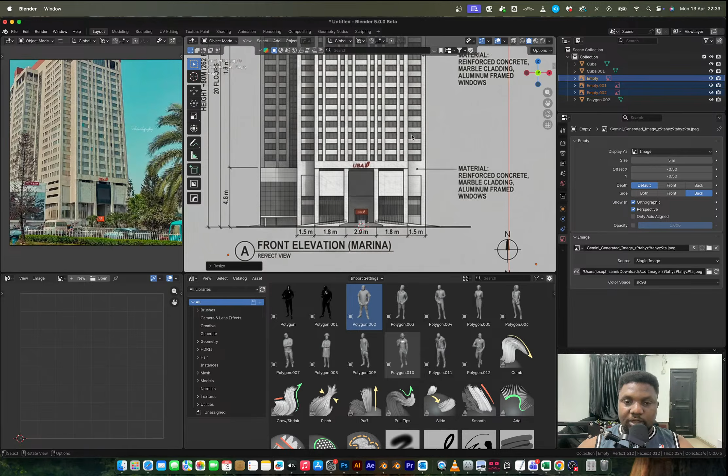So yeah, I have references in here already. Okay, it looks like I might have to adjust the camera of the general scene so that I'm not having cut off like this, because I'm building this to scale, so it's going to be a really big building.

Oh my God, where is this thing? Is it around here? I think it's around here. Yep, clipping - so we want the end to have more zeros. Yep, so we're good.

Yeah, we already have a cube in the scene, and you won't believe there's a human in the scene too. That's to tell you how small the human is in relation to the entire UBA building. So I'm going to start with big cubes and we'll build from there.

So JX out of the way. And I think for these references, I'm going to turn on opacity and drop down the opacity. Big shapes first, then we go from there. I'm going to scale this up to this point - I think from here I would just build this first, and then from right here I start building all the floors, because I feel like I'll just create one floor and then duplicate for the others.

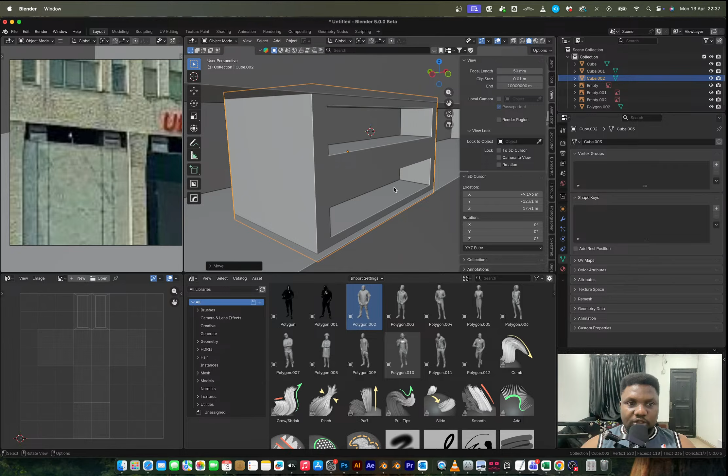right here I would extrude inward. So GY on this. I think this face I like to apply the inset tool to it. So right around here I'll bring this to this point, change to this, and we're going to have something like this - it's just going to be like a vent. Scale down, GX.

I can shift DX to create the second part of this. I feel like this should be smaller. GX, no? GX, shift DX, right around here. That's good - these two I would join, and I think I can duplicate to the other parts. For now I can use duplicate because...

What's going on? Why can't I select that? Wow, why can't I select this cube? GY. What? This is strange, like come on, man. This is strange.

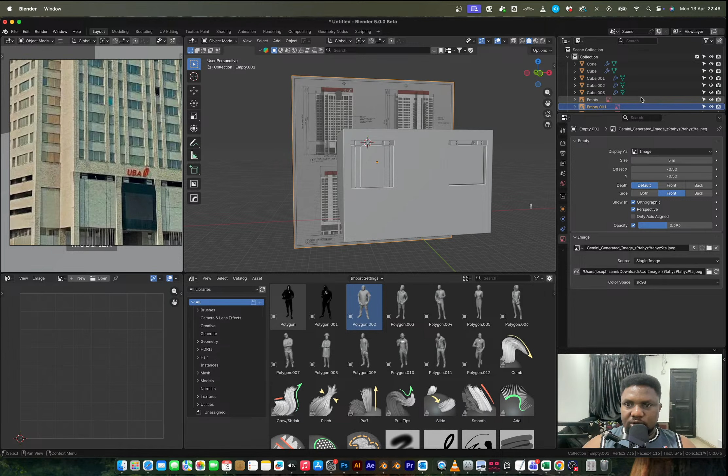So that's cool, I think all of this information definitely should be flipped. Oh, this thing of not being able to select things is just frustrating me. I need to be able to move fast, like...

Okay. So next up I'll do the center screen, and I think that screen looks something like this. Oh okay, it looks like this vent too should be in the center. So I'll shift DX and have that vent around here.

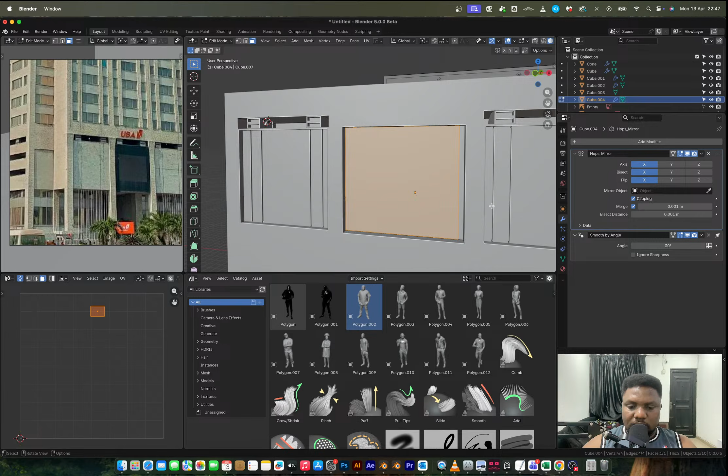Then the screen, we are looking at extrusion in. Select all, inset—no, extrude first of all, inset, SZ, and then extrude inward. So that's the screen.

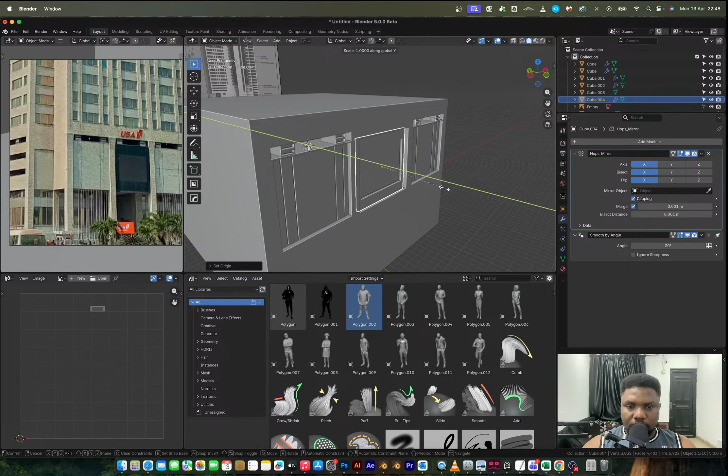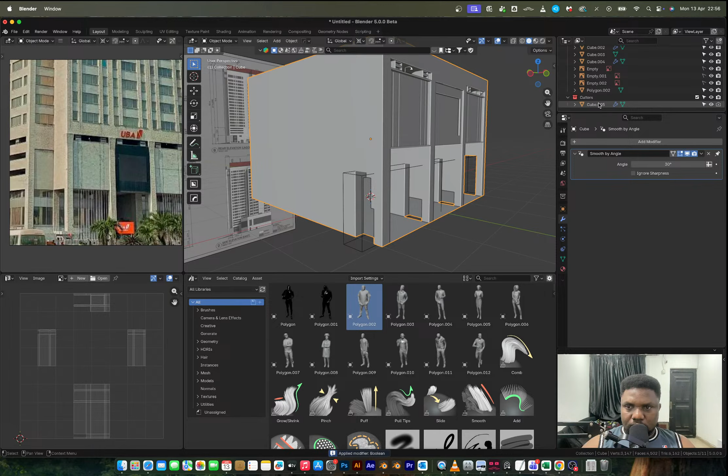I'm really not happy that this Blender is not working as expected. Like, this is already a difficult model to handle, and Blender is just making it so much more difficult.

I think right around here, there's a staircase.

I can SX, spread this out just like so, right? And on the side view, I can GY, SX, and add an array.

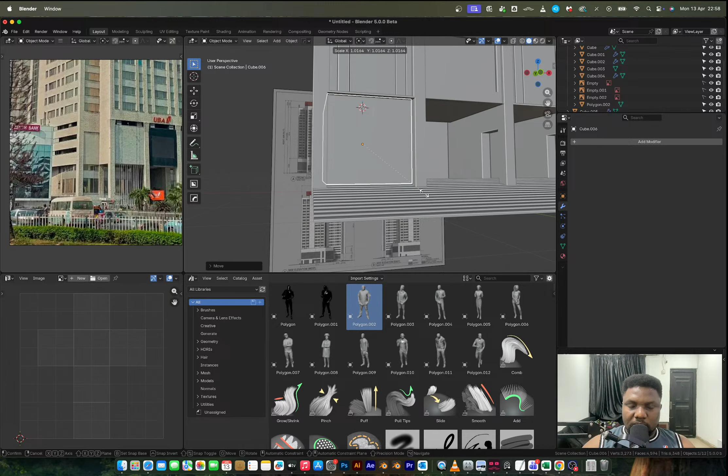Scale, I can GY, and then I can just start constructing the offices. I'm seeing something like this. We have windows down here. I don't know how many these things are, but size-wise it looks something like this to me, right? And maybe aesthetics-wise too, we have this looking something like this.

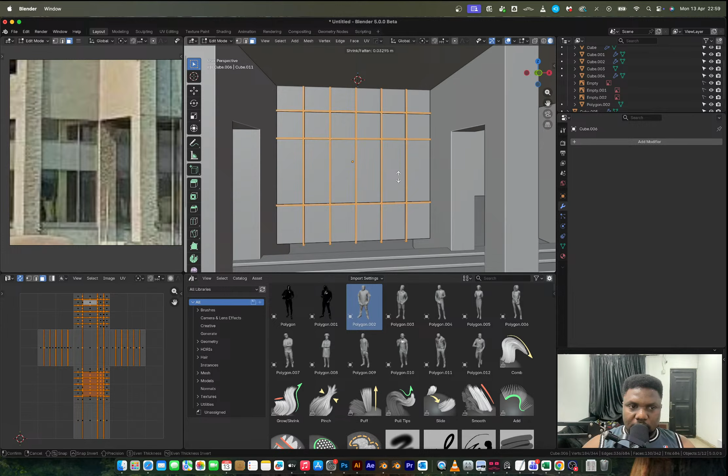So seems like all of these are extruded out, just like so, right? That's cool. And for the three left outside, I can shift DX and just occupy the space.

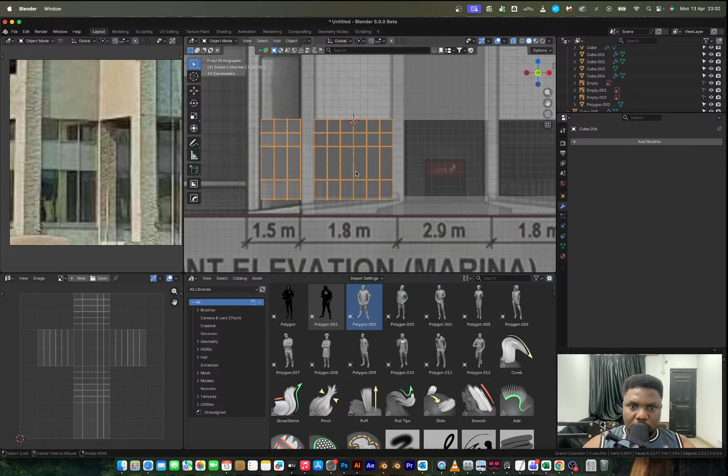It would be advisable to be applying texture as I'm working, right? It would make sense. So I'm just going to select by area.

So this is going to have—let's give this a glass texture. So I'm going to call this glass, roughness, reduce, assign. So let's see what we're looking like.

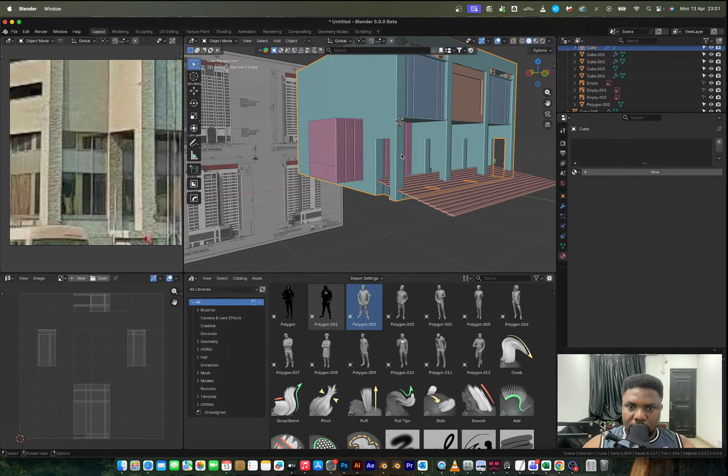Let's just go on, I don't think this thing has my time today, actually. So polygon textures, let's go look for concrete. All right, concrete material. I can bring this in here and invert all of that and just assign.

Why can't I see material preview? Like, I don't understand why I can't see material preview. So frustrated by this, and I still have a long way to go. Let me just save. I want to close and open Blender again, so give me a sec.

I think this is what? It's 7. So I'm going to close Blender and open it again. Just give me a second, guys. Shit.

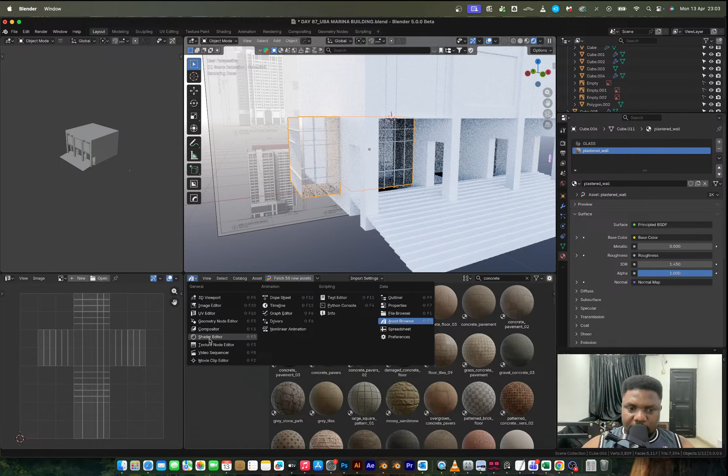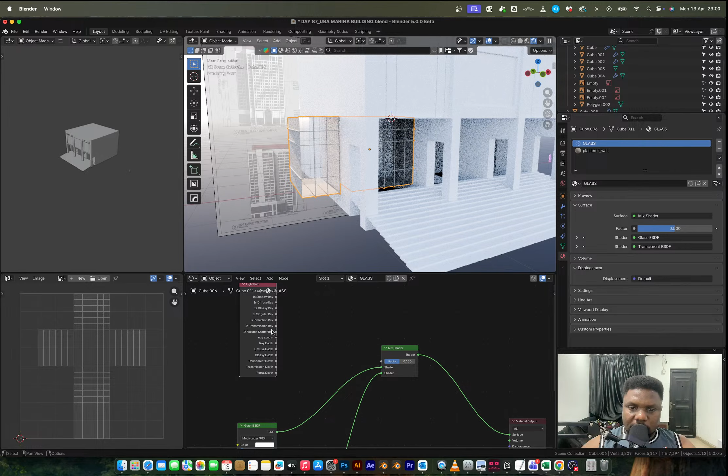That's cool, I think this glass needs a transparent texture. I'm going to do the material setup that Falcon taught me. Light Path, ray depth, and bring in a math node greater than 4. Cool. Okay, so back to this.

So I'm going on, let's go. This depth right here is around this area, so I'm going to bring in a cube, scale up, GY inward. All right, I can scale this a little bit.

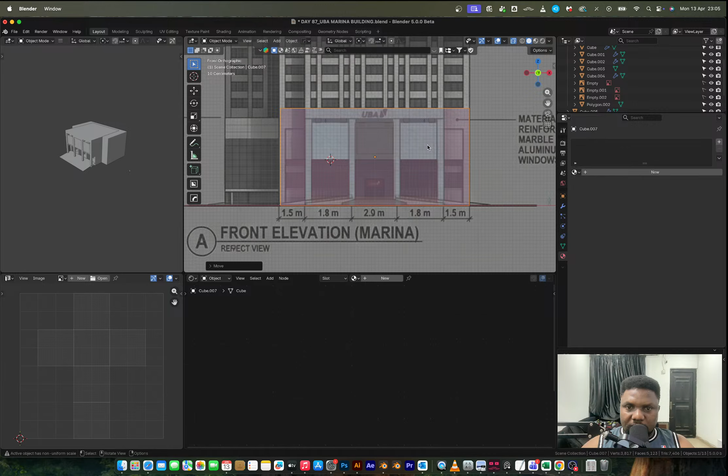That means this whole mesh probably needs to go inside like so. Let's see our reference.

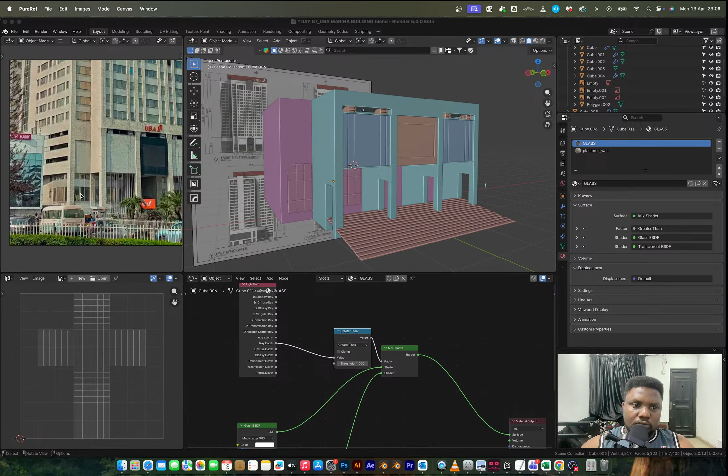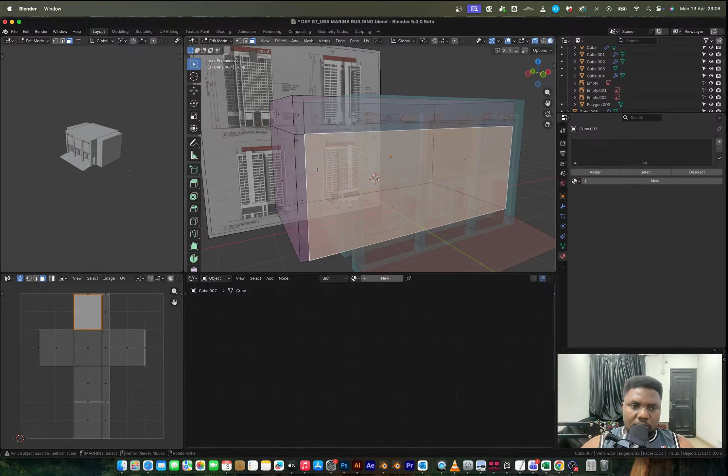So right here, I can put in 1, 2, and probably delete that face. That's cool.

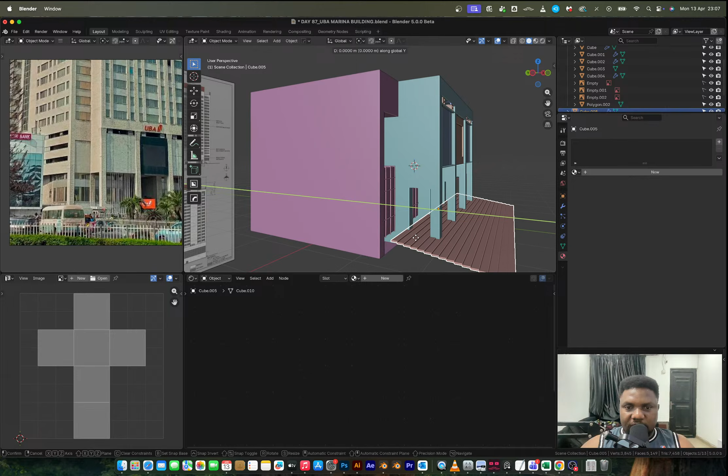Y is going to cover all of these parts. This I would GY in, so all of these faces I would EY into the space. This right here, maybe I would GY a little bit. That's cool.

All this I've been doing, I'm still on the ground floor, so I probably want to start elevating stuff and moving stuff higher. For example, right here, I want to bring in loop to this point and maybe this point.

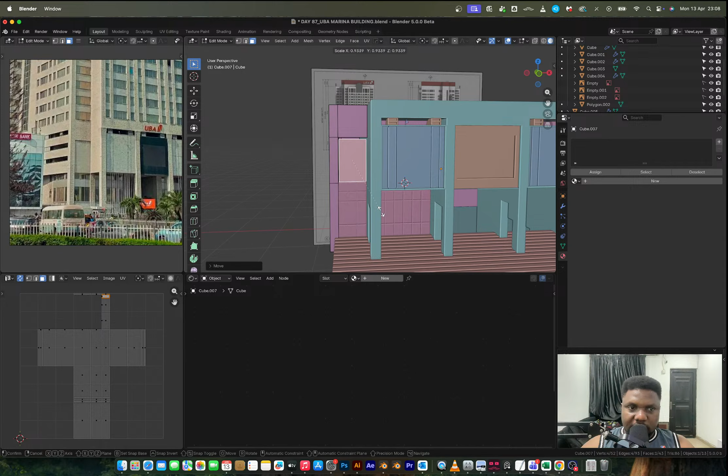So what I want to do is select this, fill in. Not actually fill in. As a matter of fact, maybe I can just copy this instead and Shift DZ and SZ and GZ. So I can just scale this down and slot this into space just like so.

Okay, on the side right here, let's see if this accounts for that. It doesn't, not like that. So a little bit of all of this right now is going to be eyeballing and just kind of figuring things out for myself right now.

Okay, this is what I'm looking for, this right here. Okay, this is longer actually. So we're going to have something like this.

Okay, so what I'm seeing is something like this.

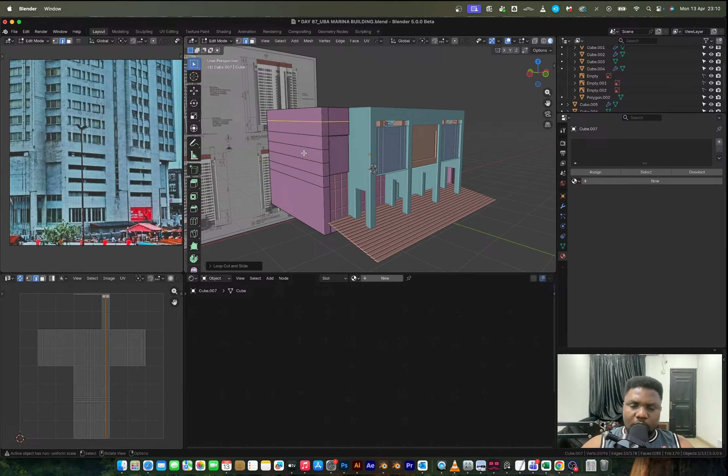We need 4. This is how many faces? 6. So I can add one more here, and this entire thing I'm going to space.

This too I would space. That's cool, so all of this all the way. As a matter of fact, 1, 2, 3, 4 are the ones that are going to have that inset, right? And we're going to SY. As a matter of fact, if I do that, I want to define this pillar right here.

Then throughout for this lower part, all of this will be missing. All of this face, right?

So I'm going to select all of this and GY all the way to the back, and I can add in some loops for windows.

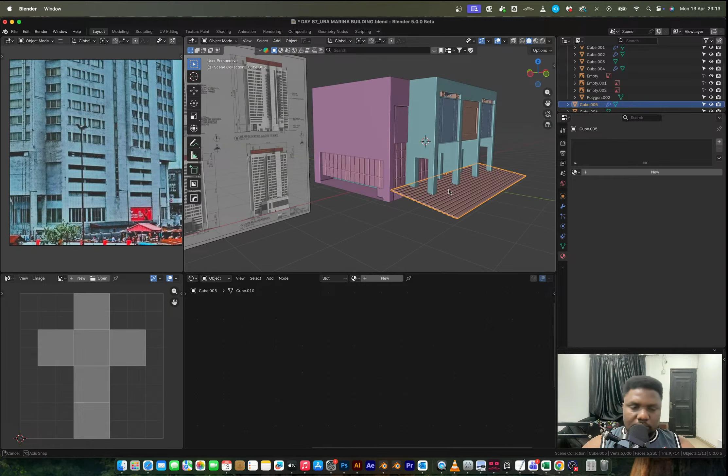This staircase, I think Shift D needs to be around this area too. So I'll rotate this by 90, SY.

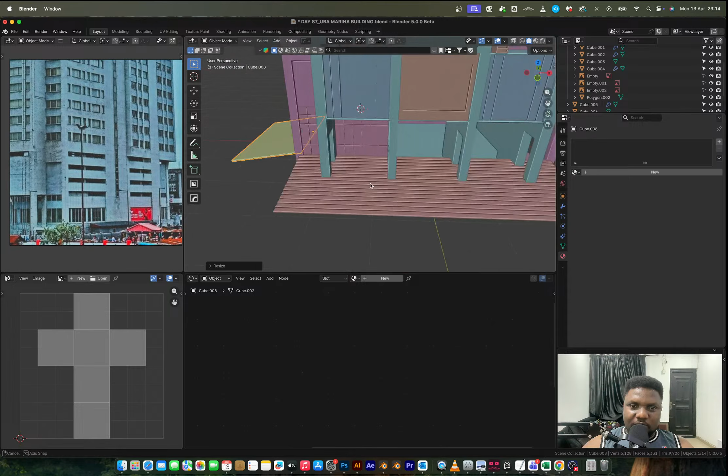I wonder how I'm going to connect these two staircases. That's going to be a very difficult nut to crack because I'm already separating both of them and it's already looking like it's going to be a problem. So yeah, I can go back to this 1, 2, 3, 4.

Inset, extrude in, and I need to bring in windows into the spaces. So maybe I can duplicate this, Shift DZ, and bring in all of those information.

GY, or GX rather. So all of this stop, I'm going to scrape off.

So I think I can confirm that I won't finish this model tonight. I can personally confirm that.

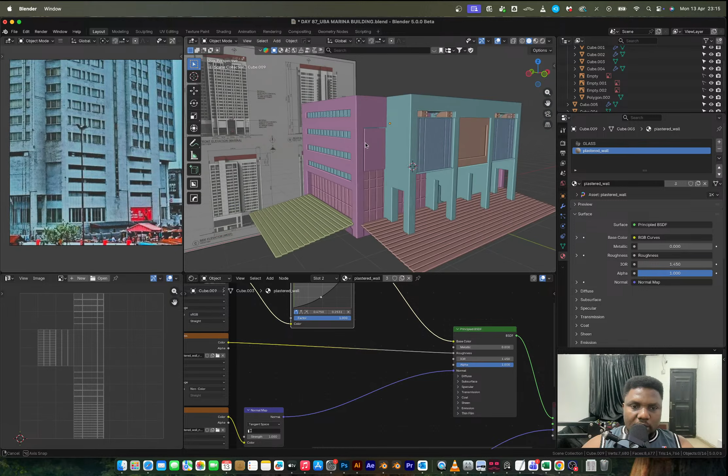SY, that's cool. This should be way smaller, but I think I can still work with that.

Right around here, all of these faces, I'll select Shift D, separate that selection. It will allow me.

So this I can extrude a little bit. Let me see if my x-axis captures that. It doesn't, it doesn't. I think it's this one, this one is actually the x-axis.

Or the side view rather, not x-axis, I mean side view. This should actually be my side view, man.

Okay, I'm almost there. Oh, that's encouraging. I won't lie, that's encouraging because this modeling was kind of off to a bad start. But just seeing that, yeah, I'm encouraged by that.

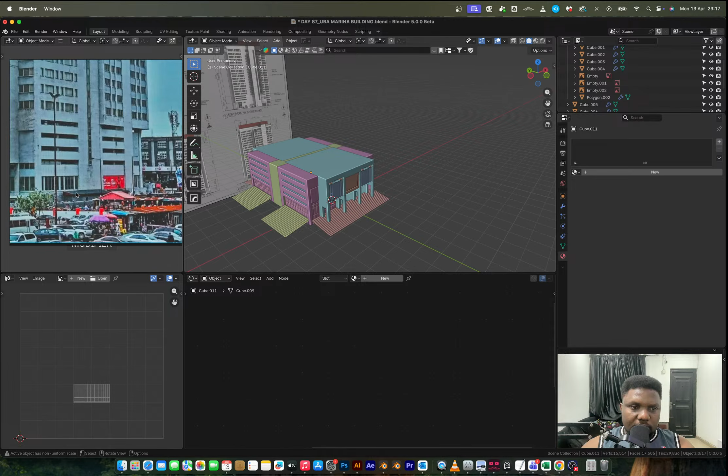Right. Hmm, so I'm looking at some of this.

It is not exactly like a window. I think that might even be a parking space. Let me see and be sure. It might be a parking space. So now I go put window.

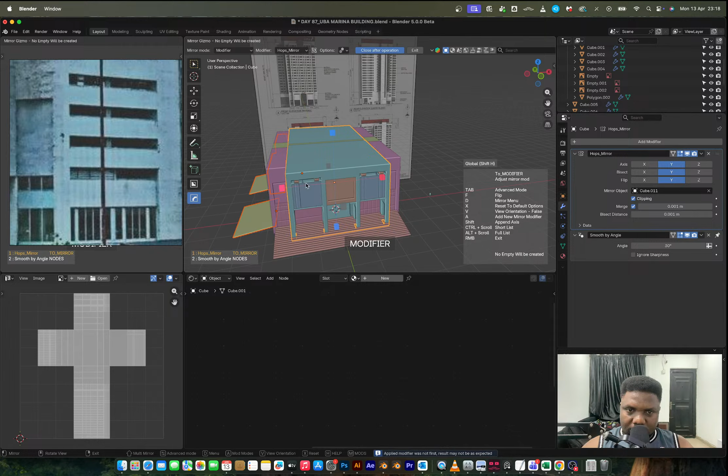So I think at this point now I can start lifting up the floors and just taking this to where it needs to go. First, I think I'll get the entire shape of the floor and then just duplicate that going upward, rather than building them one after the other. I don't know how that's going to work with texturing because that might be tricky. So let me try it.

From the top view, I'm going to bring in a cube, so that cube is going to look something like this, with an edge loop right here. This whole part will be extruded outward, this entire part extruded to this point, and this part extruded just like so. All of this I'm going to mirror to the other side. So this is the basic floor plan, it's going to be like this.

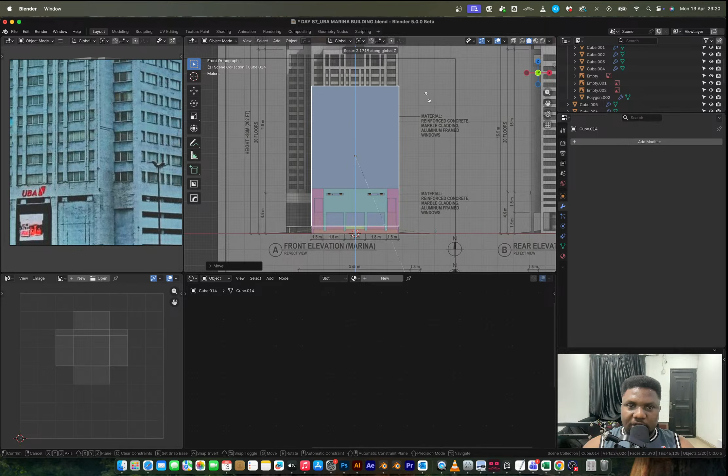Ideally I should just scale up the entire thing like so and then start filling it. I know this building has 20 floors. So what I'm going to do is... but this building is not symmetrical. Oh, fuck, it's not a symmetrical building.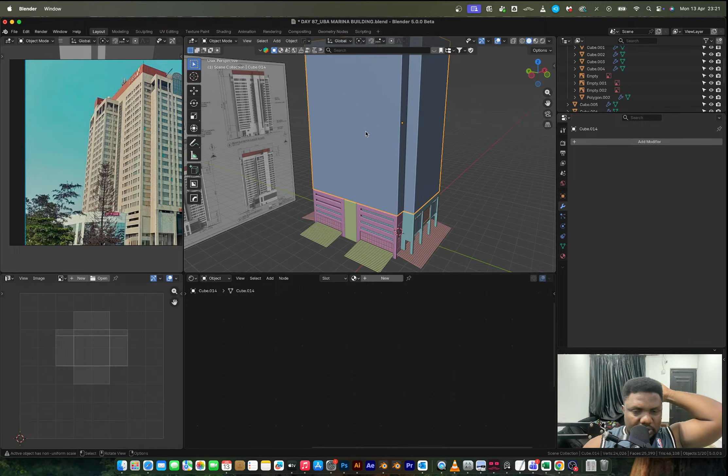I don't know what's behind this whole backside. Like I can see what's on this backside on the top side, but down here I can't see. Let me see if I can find some references. UBA Marina pictures.

I'm cool with this side, this side is fine, right? The side that I'm kind of contending with is the other side. That's this side, okay? This side leads to the car park, actually, so instead of a staircase on this side, it's going to be a car ramp, right?

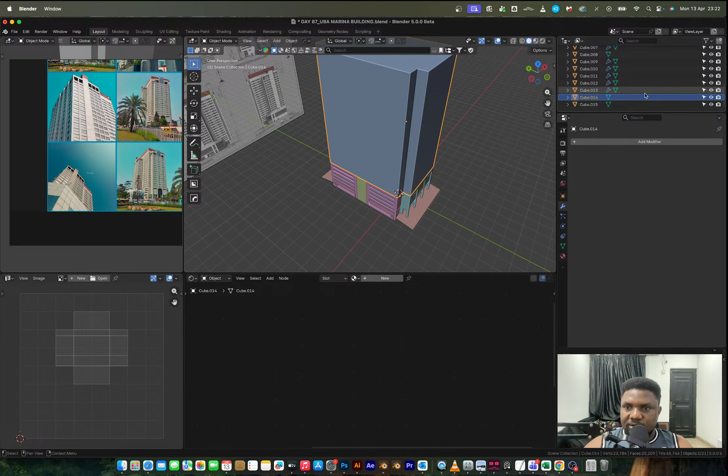So all this staircase right here, I will apply this. Apply the array, apply the mirror. All of this around the side goes away. And then you see this part right here - I'll bevel this. Select this, shift D on that, select that, and then maybe come to the front view and extrude. Yep, that's it.

While this other side is flat - this side has an extrusion, while the other side of the building is almost flat. I think the only exception could be somewhere around here where we have a little bit of an extrusion, and that's it. So that's cool. Right here, I'm going to scale on the Z and just make only one floor.

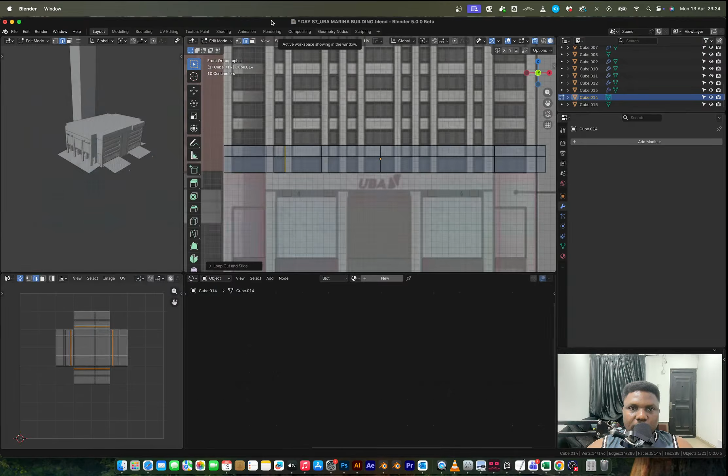Let's see, I think we have a loop right here. Let me quickly check my stream, make sure I'm still on track. All right, still on.

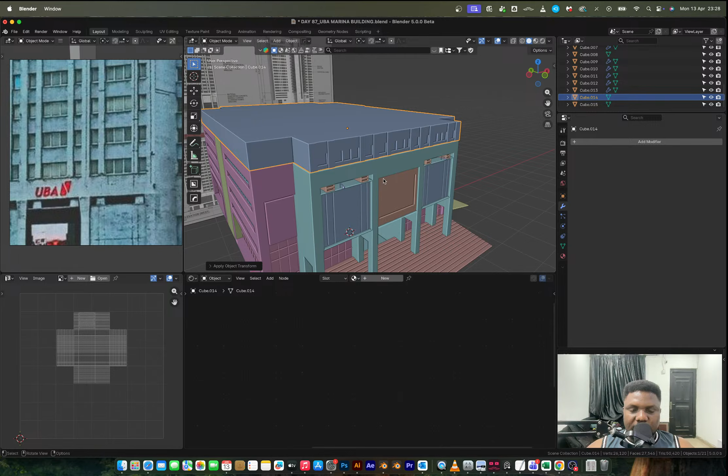I think with this I need to link this material to it, and then I can select all of it and add plastered wall material. Let's see the rendered view, see what it looks like. So looking at the rendered view of this plastered material here, I don't think I need that. That's cool.

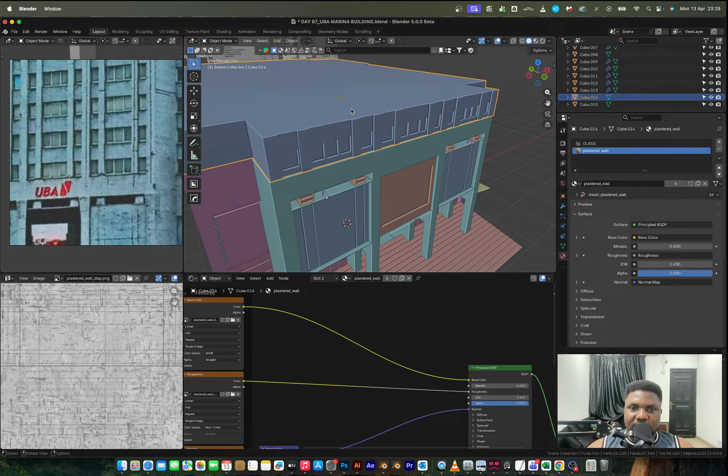So I'm going to go back to solid mode, select this top, and then the glasses are going to - I don't think I want to put glass in here, or something transparent. You should get - we're not able to see inside, and now we have to do something inside for it to make sense. Let's see. Okay.

That's cool. I think we're going to do the side too. For the side, we're going to select this and GX in a little bit. So let's start selecting some of the windows. I think we have 5, 1, 1, 4, 1. Then we have 1, 2, 3. We have 1, 2, and then 3. So yeah, same routine: inset, extrude inward, apply glass.

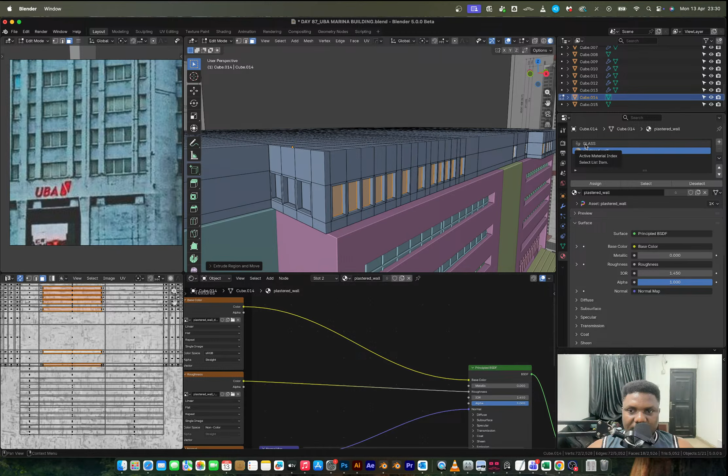So I'm seeing something that probably I should have done, but now that I've not gone far, let me just do it right now. Okay, frame selected, extrude a little bit. I'm going to do the same for the sides too. And I'm not trying to get a 1-to-1 replica of this building here, just trying to model it in a way that you'll see it and think, oh okay, I ain't mad at that.

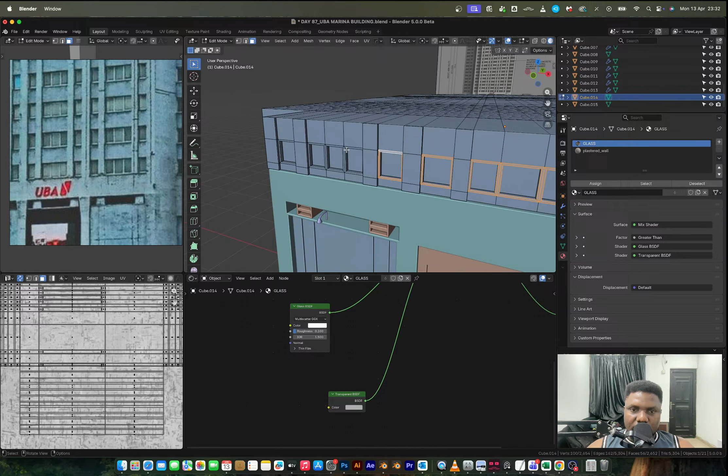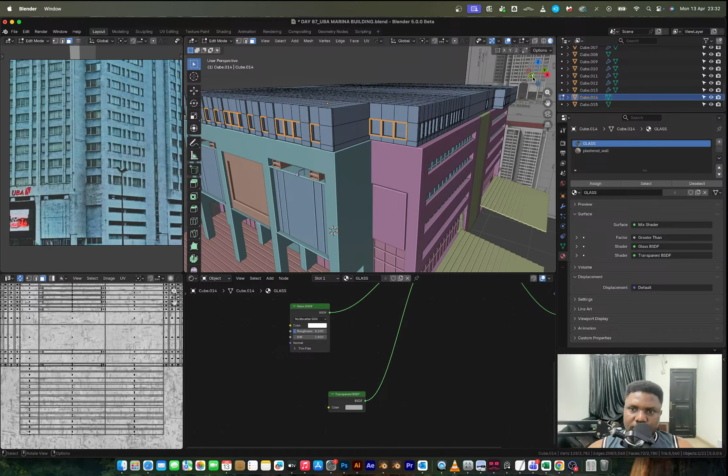Okay, so that's cool. This side's done.

I feel like the other side - let me see what that looks like. Do I have a reference for that? I think technically the same thing, only that this time around, this one too should be involved in all of that. And as a matter of fact, maybe you see this right here - I want to add it to the main body of this. All right.

So this whole mesh here, I'm going to extrude out. So this part that is tall like this is going to be the parking lot part of it. Like so.

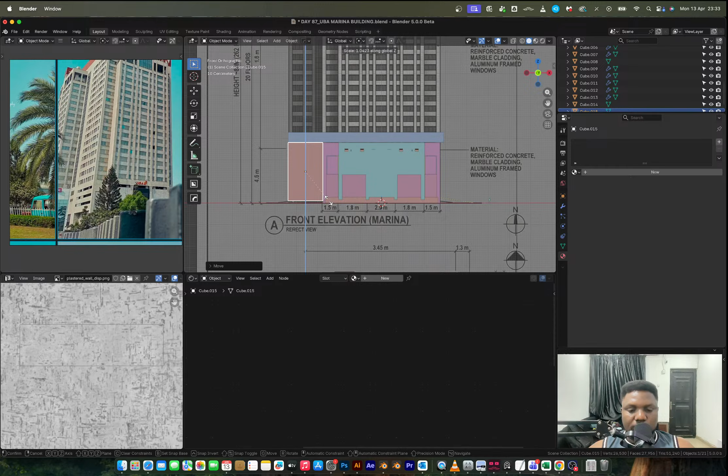That's cool. So yeah, we're just quickly going to populate this part too. I'm going to go random. Or is it even random? No, it's not, like I already have it on the other side. So I think it's 1 1 5 1 1 4 and then 1.

So we can insert or extrude first of all. No, extrude first of all, insert, and then extrude in, apply glass. That's cool.

This one we are seeing 3 and 2. However, it has pillars, so I'm going to add one pillar on this side and another pillar on this side. And we have 3 glasses and 2. So this, first of all, I'm going to extrude out as a pillar. I think this is a pillar. Bevel that into a pillar. And then extrude this outward.

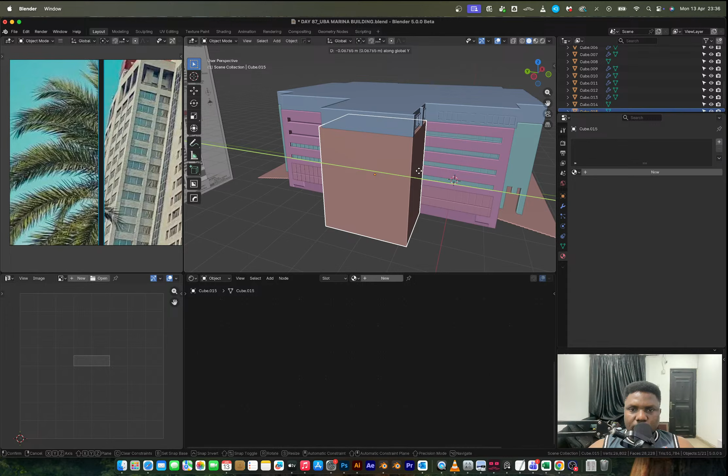Space, space, space, space. All right, so we're going to go with something like this.

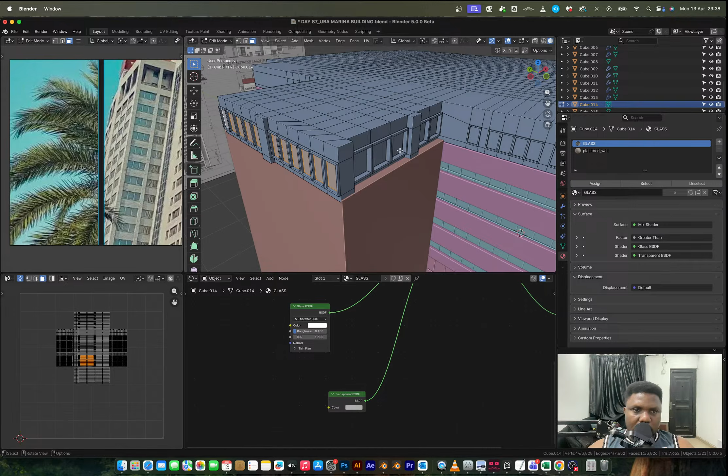So this backside here, you know what I feel like doing? I feel like just copying and pasting something, but let me do this instead.

Entire floor ready to be duplicated, but let me see rendered view what it looks like. Oh, this one I'm on Marina.

Unwrap box cube, UV project. That's cool.

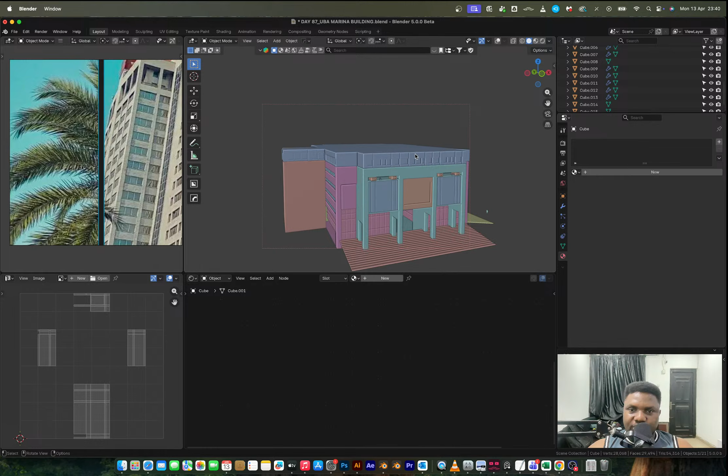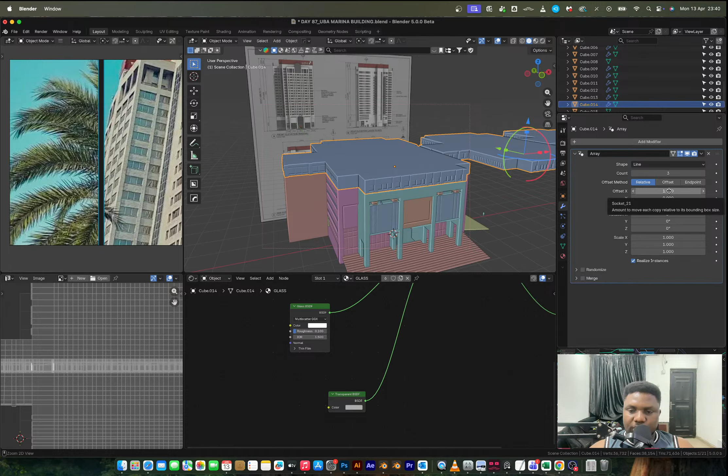So this will be arrayed 20 times. I'm going to bring in array modifier, and the array is going to be... you know what, I'm bringing this array here. So we're going with the Z-axis, just like so. So this part, we're going with 19 duplicates.

I'm not sure I'm particularly happy with textures, but let's just go on. I think, yeah, I need to do that car park, or the entrance to the car park. That's the side, right? So what it looks like to me is...

Right here we have this halfway, and then we have two of this, just like so, or three rather, and then this bevels like so, and then this three bevel. So 1, 2, 3.

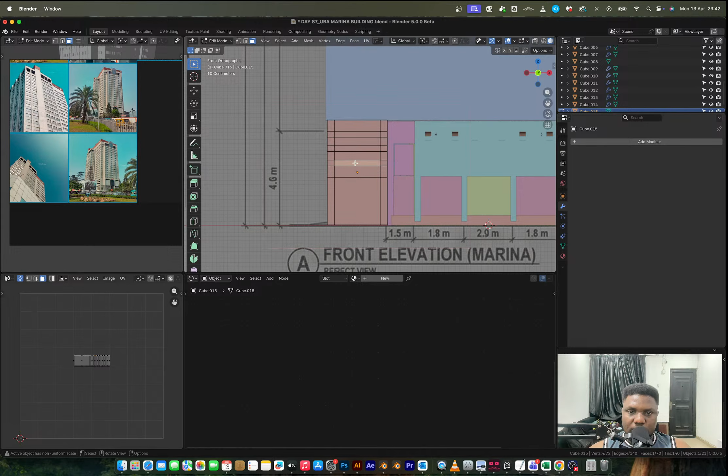I think to the side too. 1, 2, 3. All extruded along normals inward. So this can be both flipped. This can be flipped.

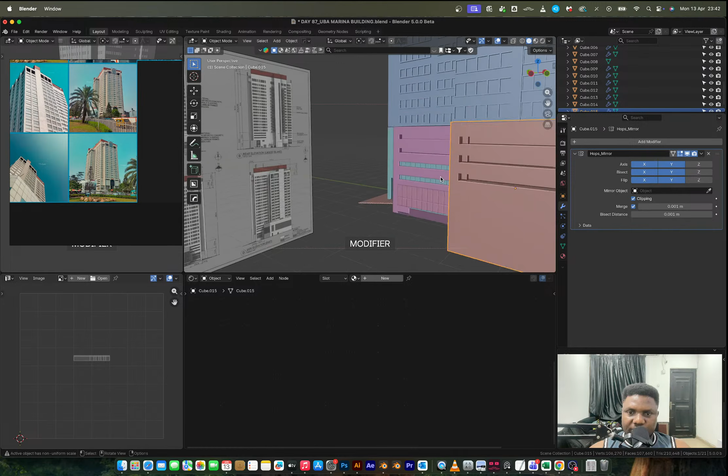Right, down here, I think we want to open up this part entirely. Like you see all of this, I want to delete all of that face. And if there's a car that's going to enter this point, fill.

So this part, it's not a staircase, it's a ramp. Like, see the ramp curving in. So I'm going to do something like this.

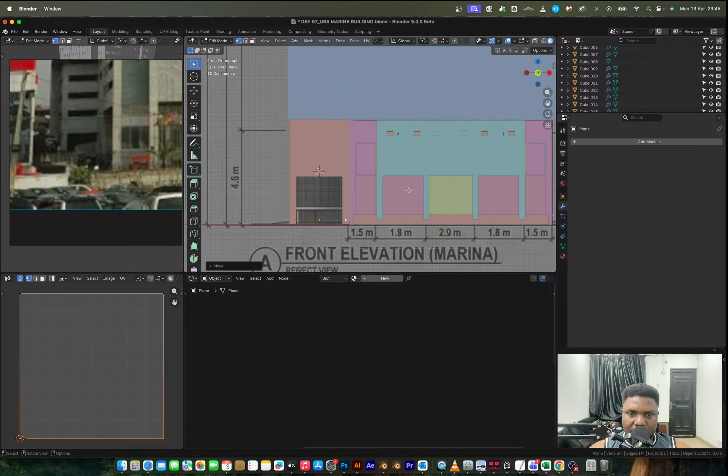To this point, I'll bring in a plane, scale that down, GZ, 1 to GY. And right here, I'll extrude. And then I'll extrude again, but this time around...

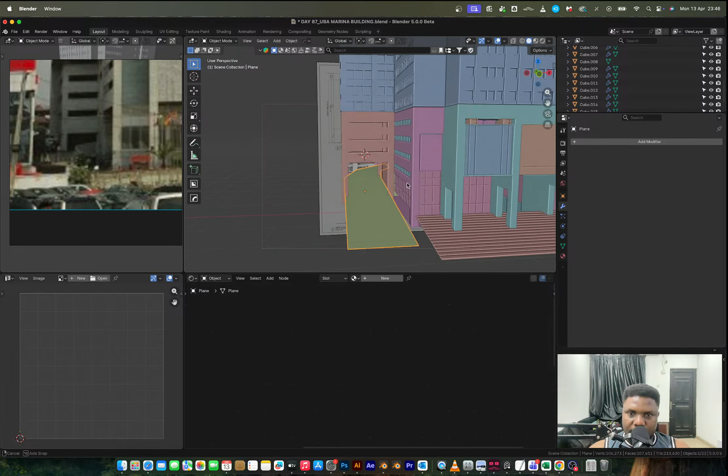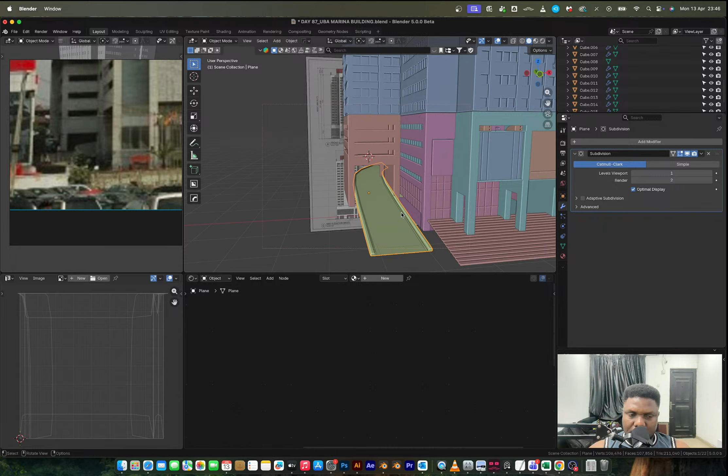So I think this extends. So, just like so.

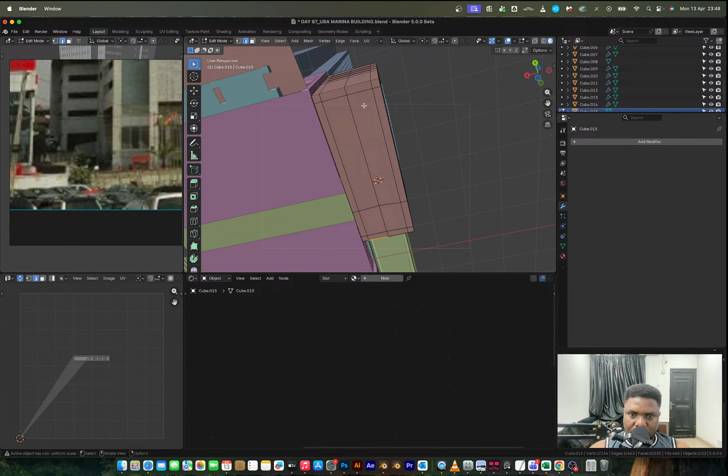Okay, that's cool. So you see the spots. Okay, I ain't mad at that.

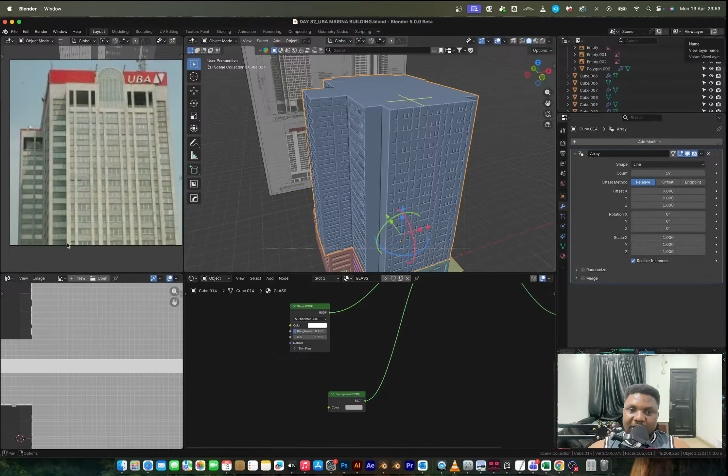How many days are between 1st of February when I started and today's date? There are 71 days, and on my count, I'm on day, let me see, day 67. So I am 4 days off, right?

And the difference between, let me see, how many more days to day 100? Let's see. Day 100 would be 11th of May. That's 28 more days.

How many models do I have here remaining? 1, 2, 3, 4, 5, 6, 7, 8, 9, 10, 11, 12, 13, 14, 15, 16, 17, 18, 19, 20, 21. Oh, I've missed this. 22, 23, 24, 25.

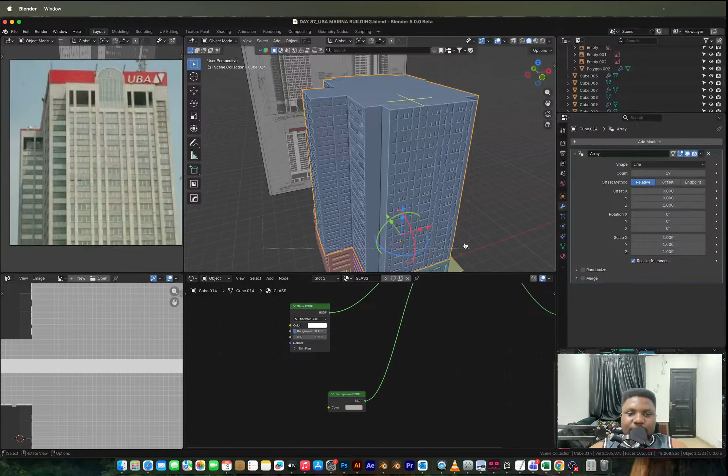So I think I'm going to have to be modeling some simple things to actually meet up with this time, but I think total of the models that I need to do on sheets to cover up is like 24, 25, and the amount of days I have is 28. So yeah, we need to double up on this. So I'll complete this tomorrow and probably also model one more thing that I can strike off the list.